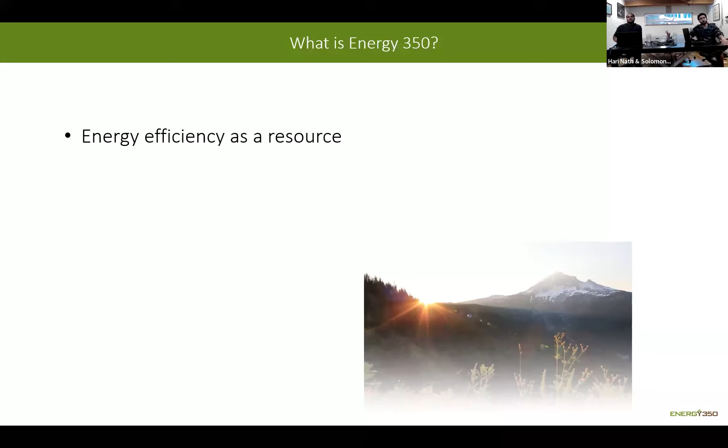One of our perspectives is that by connecting the dots of each system in the built environment, we can use engineering to mitigate our energy consumption. Our job at the end of the day is telling a before and after story with very limited information. And lastly, we're a company of weirdos, but we get the job done and we have the credentials to do it.

So really quick, diving into strategic energy management, that's what I'll be talking through. I'm opening with this question: what if you could save 3 to 5% of a facility's energy use with the same equipment they're already using? That's a pretty great deal, right? Why wouldn't you do that? That's what you're trying to do with SEM, Strategic Energy Management.

So what is SEM trying to do? SEM's goal is creating and sustaining a culture of energy management within a facility and making energy management a core business practice. I think it's really cool, and it's something I wish I had learned about when I was at Western. So I'm glad to be able to share it with you all today.

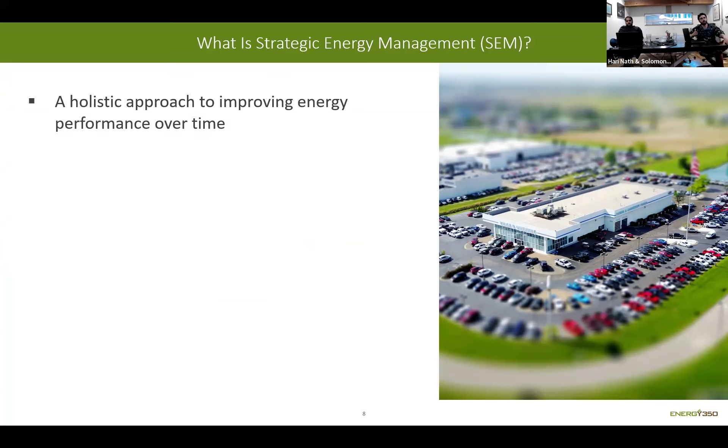So what is SEM? It's a holistic approach to energy, more than just project-based. It's similar to the idea of holistic health, the idea that everything is interconnected, from the people who work at the facility to the machinery operating there. And it's really focused on organizational change.

The goal is to help customers make energy management a core business practice, ingraining it in their culture. A major part of this involves educational workshops, technical support from our team, and getting buy-in from employees to make energy management practices stick.

It's really looking at energy savings throughout the facility. We look at the facility from a top to bottom, process by process approach to identify opportunities for savings. And these savings are actually measured through a top-down energy model, which I'll go into later.

We're really focused on low and no cost measures, so we're thinking beyond capital projects, helping them identify quick wins like set point adjustments, turning equipment off, fixing compressed air leaks, things like that.

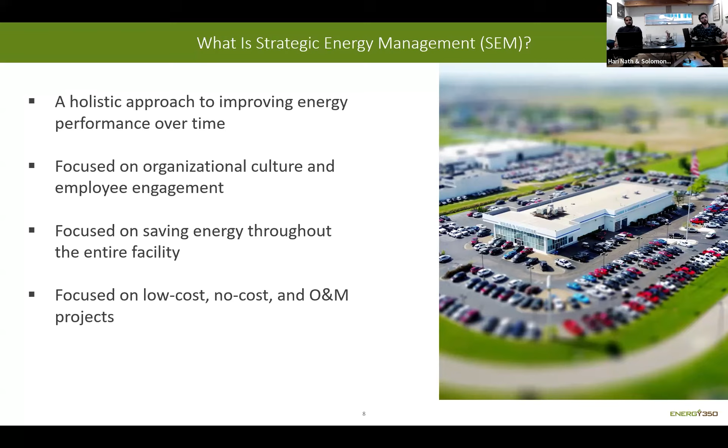And it's cohort based. So we work with anywhere from 4 to 9 different companies in a single cohort, and they're all sort of learning together and working individually to help save energy.

What makes SEM different from a typical energy efficiency program? The main differences are that SEM is really focused on teaching energy management practices, behavioral change, and low and no cost projects, while a typical program would be more focused on equipment and controls replacements and retrofits.

Additionally, SEM uses top-down regression analysis to measure savings, while a lot of other programs calculate savings using bottom-up, project-specific calculations. But both develop projects, quantify savings, and win incentives, with the goal to reduce the operating costs for the customer and utility.

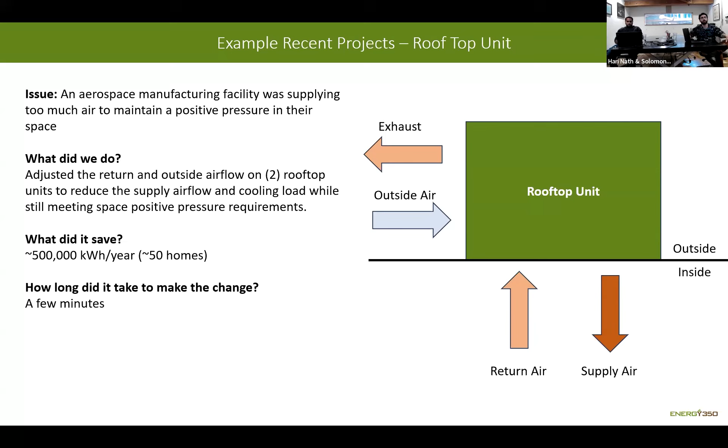Another example project: a greenhouse was using excess lighting in shoulder seasons when it wasn't needed. So this project was just to stop using supplemental lights earlier in the spring. The site actually came up with this opportunity, and we just helped educate and empower the staff to make the change through workshops and regular meetings.

Typically over 50% of the opportunities come from staff who are just empowered through SEM to implement their ideas. This saved 400,000 kilowatt hours a year, which is the equivalent of 4.5 million tacos if you burned them in a power plant to generate this electricity. This was also a really quick change - it took like 2 minutes and saved a lot of energy.

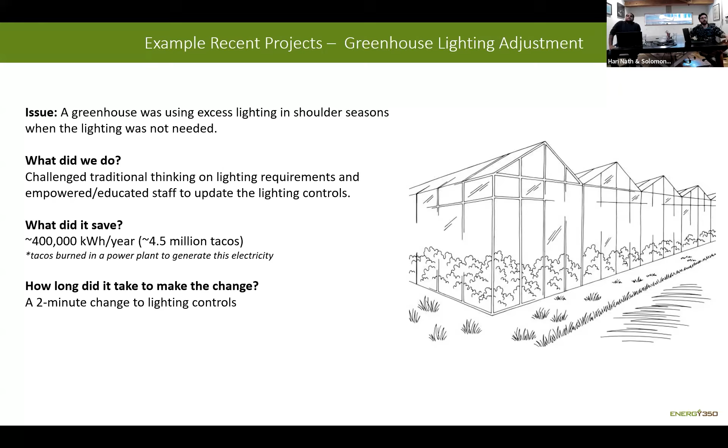So in this example, a food manufacturing facility had a lot of compressed air leaks, which were causing its air compressors to waste a lot of energy, generating extra compressed air that's consumed by these leaks. So what we did is we used an ultrasonic leak detector to identify compressed air leaks. You can see on the right, those photos are from the ultrasonic leak detector - basically it's heat mapping the sound of the leak, so you can actually visually see where compressed air is leaking.

Air compressors are only about 15% efficient, which means 85% of the energy is lost as heat. That makes compressed air very expensive to make and leak. So we found these leaks so that they could be fixed. It took about 5 months to fix all of these leaks, and it saved about 400,000 kilowatt hours a year. That's about 22 million homework assignments if you burned them in a power plant, assuming 3 pieces of standard paper per assignment - I thought you students might support that as a form of energy.

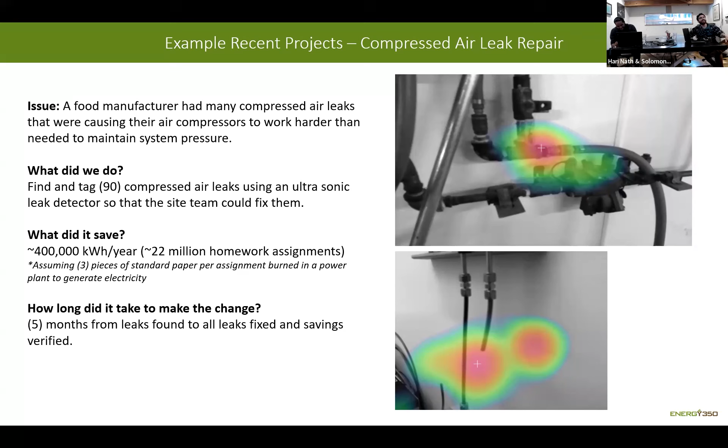So moving on - after you're implementing projects, how are we measuring energy savings? This is something I was mentioning earlier, this SEM predictive model, but I didn't really explain how it works, so now I can dive into that.

This is a tool that uses past data to make a prediction about future energy use. In this diagram, orange is the predicted energy use, and the blue line is their actual energy use. On the left side, that's the baseline period before they've started SEM. You can see the blue line and the orange line are really close - actual and predicted energy are nearly the same.

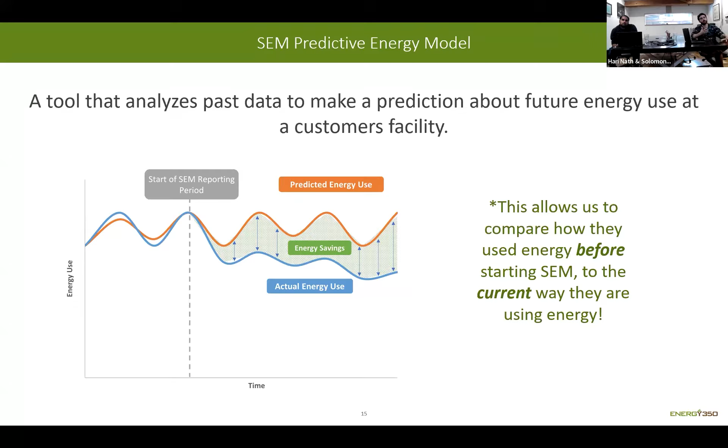Then they start SEM, and their actual energy use starts going below their predicted energy use. That gap between the 2 lines, that's the energy savings - that's what we're quantifying with this model. Something that's really cool about this is that it can capture energy savings from behavioral changes that would be really hard to capture through other forms of calculation. So it's really helpful for SEM when we're teaching energy management practices and making behavioral change for energy efficiency.

So how are we making these predictions? To predict energy use, we create a model using multivariable regression analysis - statistics. We look at major energy drivers and their impact on energy use. First we have a constant called the intercept in the model, and this is essentially the baseline energy consumption for the site. Then for each energy driver that we choose, we get a coefficient to multiply the variable by.

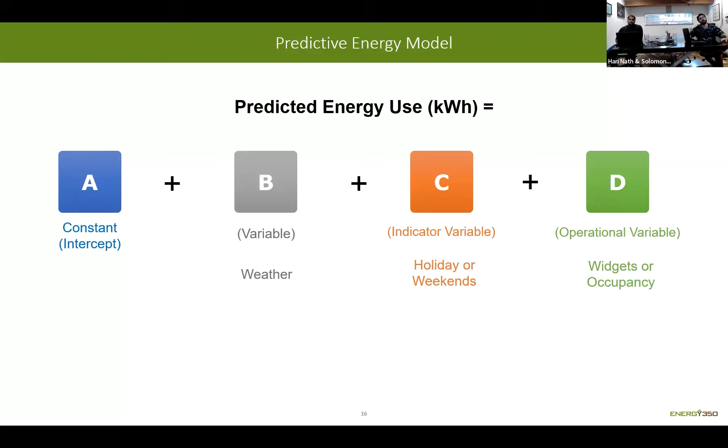These energy drivers can be like weather, schedule - like holidays or weekends - or production, because we're working with industrial facilities often, so like toys that they're producing, trucks they're producing, food, or occupancy, depending on the building type. Every site is different, so they can have different energy drivers even if they're similar in the same location. But that's kind of the typical framework of a predictive model.

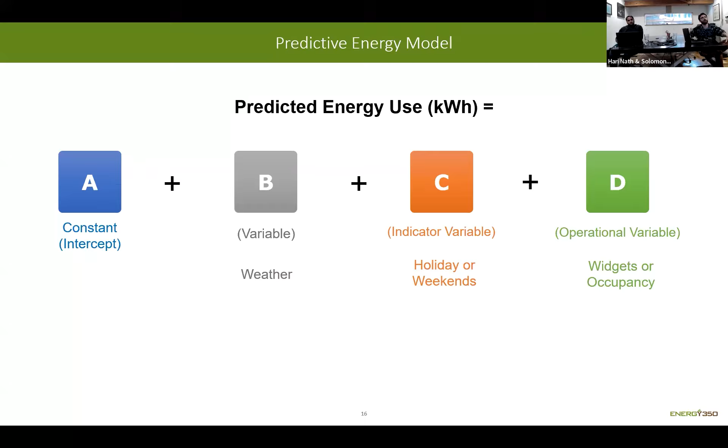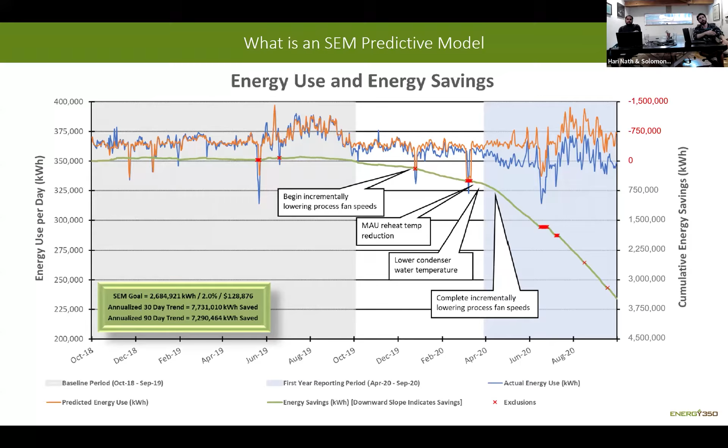And then they started implementing projects. The gap between the orange and the blue line is increasing as they're implementing projects. They're lowering fan speeds, reducing temperature set points. And as they're implementing these projects, that green line starts getting steeper and steeper. On that graph, you can see they're saving over 3 million kilowatt hours through these projects. As these projects are implemented, that saving slope gets steeper, and that's SEM really doing its work.

Now briefly, I wanted to talk through some of our curriculum that we use to help find energy projects with the industrial facilities we work with. First, we start with the components of energy efficiency as a framework for looking for energy efficiency projects.

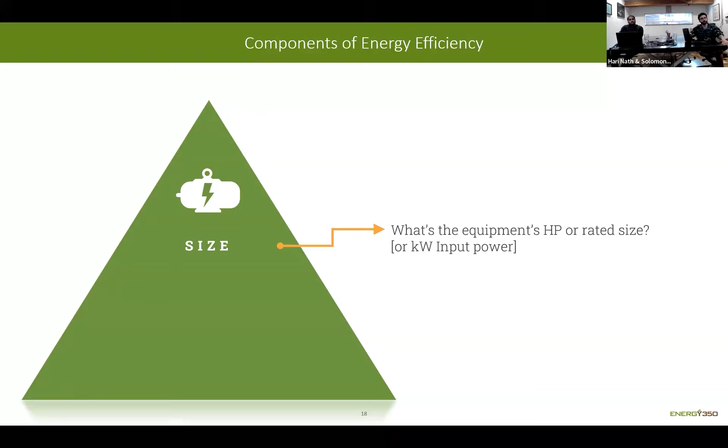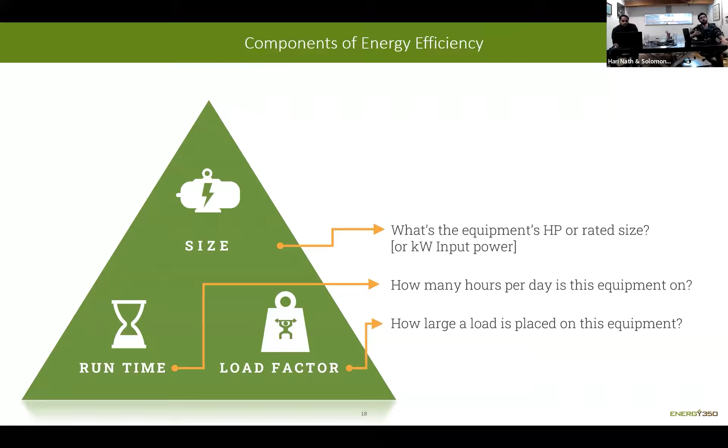The first item in this is size, so think like the rated horsepower of a motor or the watts of a light bulb. The next is runtime, so how many hours a day is this running? And then lastly is load factor - how hard is this equipment working when it is running, what kind of load is being placed on this equipment. Once we're looking at that, we want to think about what percentage of energy use is being lost as waste, and can we modify any of these factors to reduce that waste?

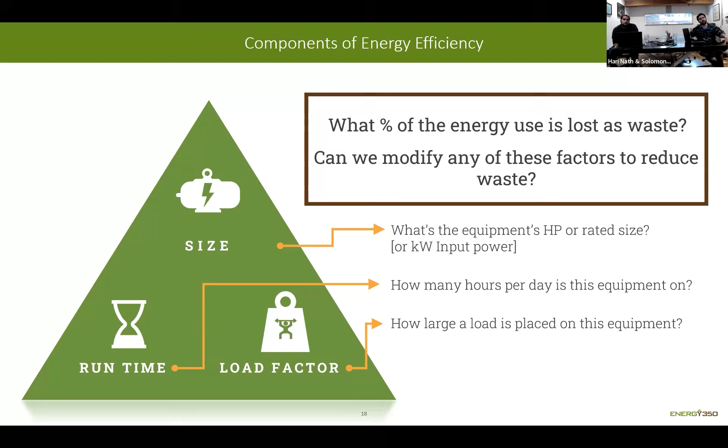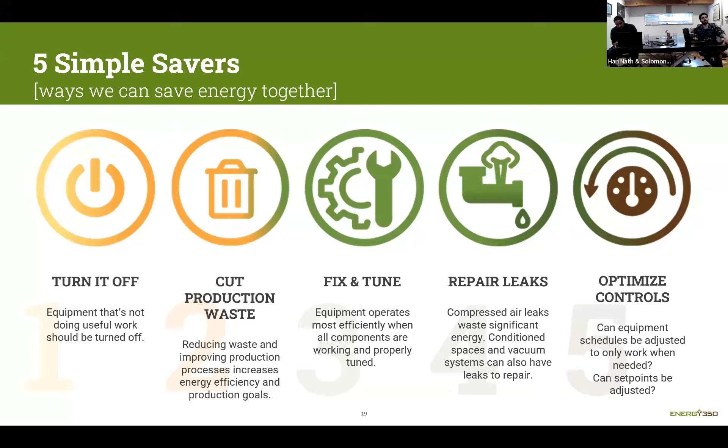That framework, along with the 5 simple savers which I'll walk through now, helps guide how we look for energy projects in facilities, particularly industrial buildings. So here's the 5 simple savers: turn it off, cut production waste, fix and tune your equipment, repair leaks, and optimize controls. I'll briefly touch each one so you understand what they are.

So turn it off - this is pretty simple. Equipment uses the least energy when it's not running at all. So if it doesn't need to be running, turn it off. That can be lights, process equipment, motors, HVAC systems, anything that's using energy.

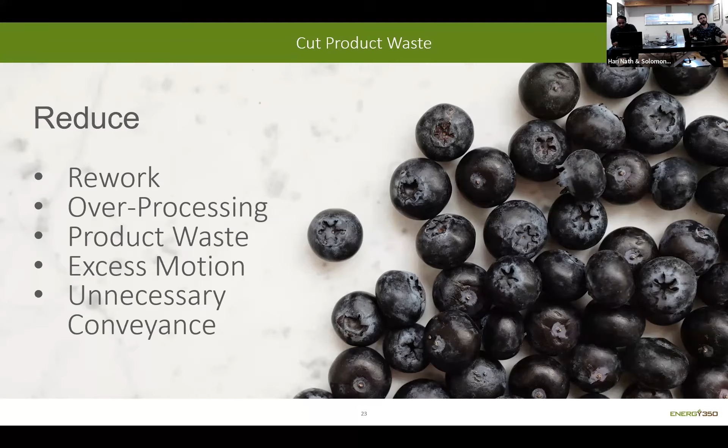The next is cut product waste. Like I mentioned, we work with industrial facilities that are making a process good, and production waste also wastes energy that was used to make that item. This can be reworking or repairing defects, creating wasteful or unusable products, or unnecessarily moving or processing the product. That's all forms of wasted energy that we want to avoid.

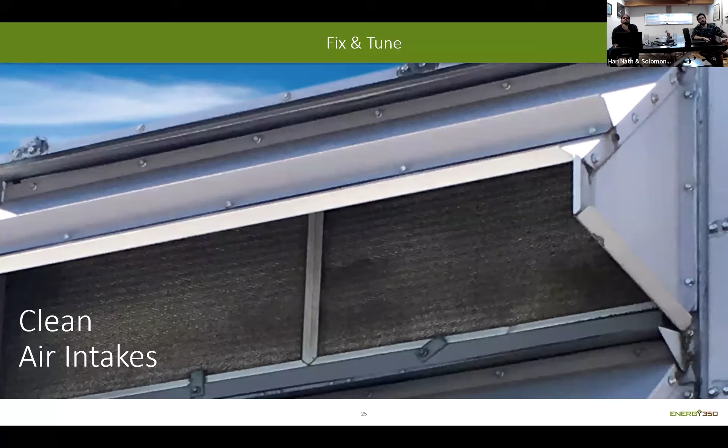Next is fixing and tuning equipment. Equipment operates most efficiently when all components are working and properly tuned. Dirty air filters are a really common example here. You can see in the photo, clean air intakes - making sure your air intakes for your equipment are clean. Broken dampers, leaking valves, broken sensors - fixing all of these will ensure that the equipment is operating like it's supposed to.

The next one is repairing leaks. By definition, anything leaking is wasted energy. In industrial buildings, compressed air is the big one. An air compressor is roughly 15% efficient, like I mentioned, so it's really expensive to make compressed air, and even a small leak can waste a lot of energy. Here you can see a 1/8 inch hole is costing nearly $3,000 a year in energy costs in this example - really huge energy use. But it can also apply to conditioned spaces, water pipes, vacuum systems - they can all leak.

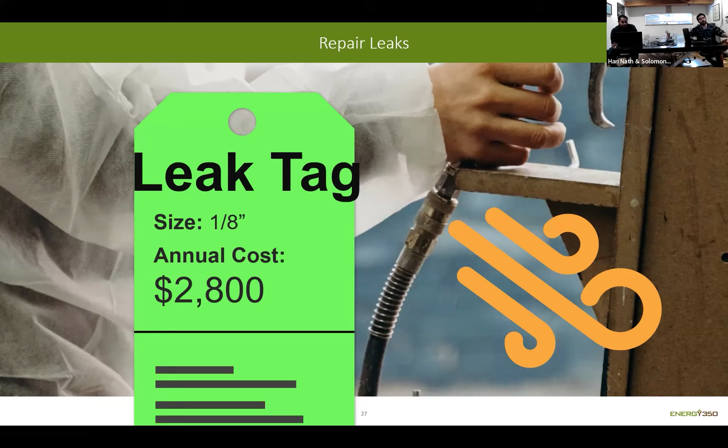And then lastly, optimize controls. Often equipment is scheduled when it's first installed and it's not revisited. This is really about matching equipment operation to the hours that it's needed, adjusting set points within space and equipment requirements. In this example, you can see there's an example schedule where the HVAC system is running normally on 4th of July when the site was shut down. So this would be a really good opportunity for scheduling the equipment off on holidays so they can save some energy there.

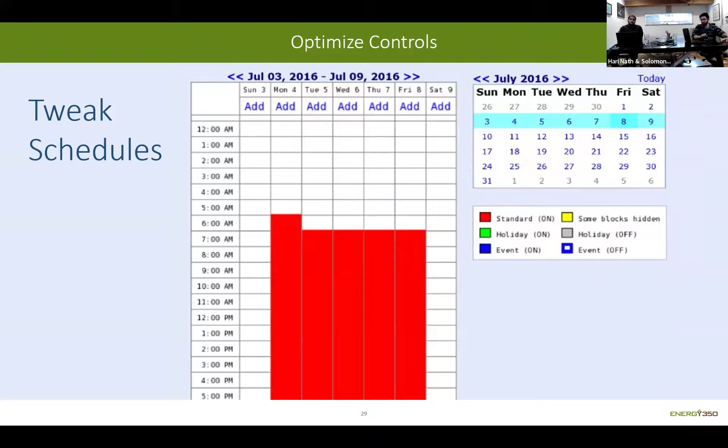Another set point example or controls optimization would be updating compressed air pressure set points. Since compressed air is so expensive to generate, about 1% of an air compressor's power is saved for every 2 psi that you reduce the air pressure set point, and that can really add up to a lot of energy savings if you can reduce that set point a lot. But also updating HVAC and process set points can also be really great energy savers.

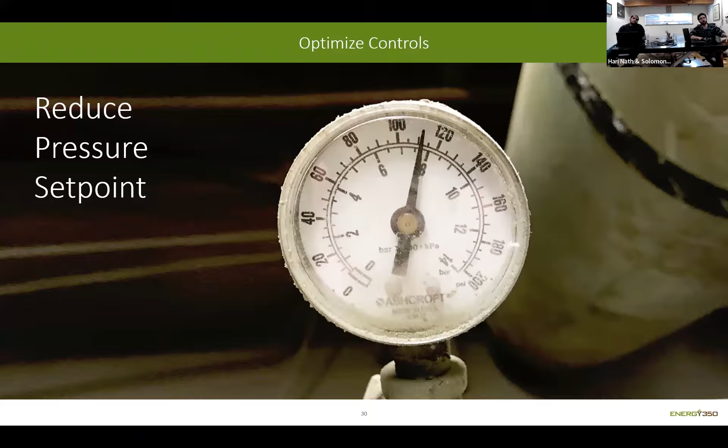Oh, let's see. There we go.

All right, so that was kind of like a great overview of SEM. A big portion of SEM is that top-down approach that Solomon was talking about. And I think the beauty of this company is that we have a lot of people that sound like they have the same job, but in reality have quite different jobs.

My day-to-day is almost the exact opposite in a lot of ways. It's looking at the individual component of a system and then breaking down that story, getting up to the whole building through understanding the whole system and how that impacts the whole building energy usage. This is a great picture of my colleague and I staring at compressors for a cooling system, both not having any information on how it's working, just taking time to process it, absorb it, look at what's going on.

My day-to-day is trying to identify and quantify an individual problem, something like an occupant saying it's too hot or too cold, or something not getting any airflow, and we have to quantify that somehow. So we have site visits. We are on site observing the systems and the behavior of the system, and also the occupants and people that interact with those energy systems. We data log. We have little data loggers that measure temperature, amps, motor on-off status. We usually do that over a 2-week to several month period, and that gives us a pretty good snapshot of what a system is doing. Then we analyze it and communicate it to look at potential cost savings, incentives, and sometimes CO2 reductions.

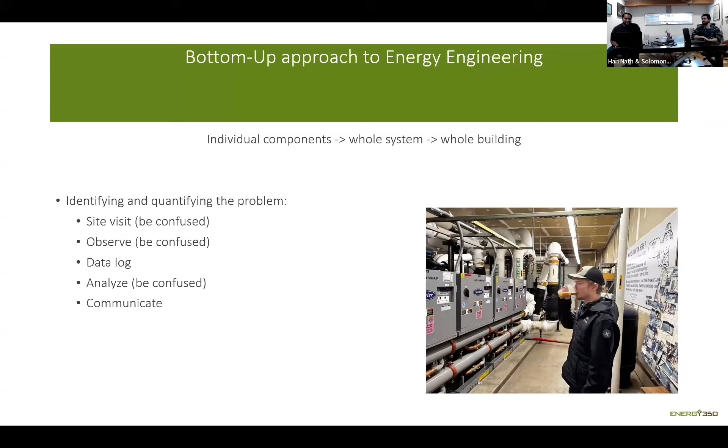A large portion of our job, both of our jobs, is storytelling. It's explaining a before and after of what that after could be. It could be a prediction, or it could be measurement and verification, where we actually verified through those data loggers that the energy usage and consumption of those systems has been reduced. And a very large portion of the job is being confused. I'm sure that translates to most of the jobs at our company, but that's just the nature of this work - it's like going into a room with the lights off, there's a dartboard, and you don't know how to hit the target, you don't know what's going on. That's how it feels a lot of the time.

So for site visits, I want to break down what it feels like in person. The first thing beforehand is just asking some basic questions. Why am I going? Am I contracted to look at a very specific system, or are they asking me to look at the whole facility and come up with recommendations? What are we looking for, and what systems am I expecting? Depending on the site, I could be expecting to mainly look at air compressors, industrial refrigeration, or HVAC. So I want to narrow down before I get to the site what I'm going to be looking at.

Sometimes it's pulling up the site on Google Maps and looking at satellite imagery to get an idea of what kind of systems are on the roof. It's always kind of surprising to realize so much can be learned about a facility just based on a satellite photo. And then, who are you meeting with? Recently I was supposed to be meeting with the facilities manager at a college campus, and I ended up meeting with their plumber because the facilities person was too busy.

So who you meet with really dictates the site visit - what kind of questions can you ask. You have to suddenly start thinking through different channels, like what is their background, how are they approaching the system, what do they know about the system, and what information they have can I get to help me get through this project.

Some of the gear I take with me is basic tools. I take vests, helmets, steel-toed boots for safety. I take data loggers, arc flash gear to make sure I don't get zapped - I've never been zapped, I don't want to be zapped, I plan on not being zapped. I take a notepad, I take a phone for pictures.

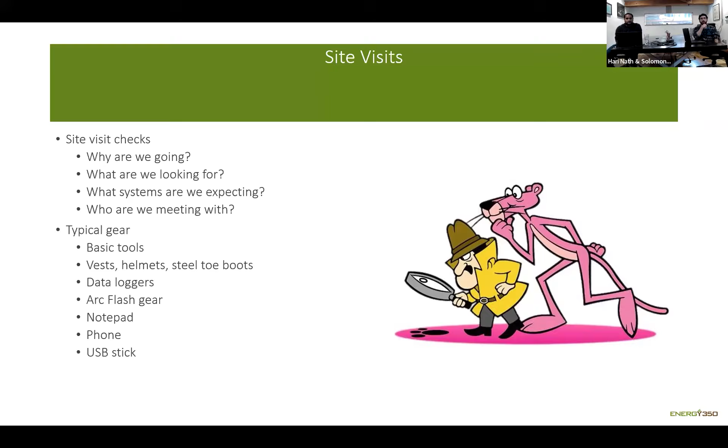So, expectation versus reality. I'm sure some of you have already experienced this if you've done any site visits, like the field trip class or any class where you visit different buildings and see the different mechanical systems on campus. There's kind of an expectation in your head of what something might look like, and then you see it and realize just how confusing the real world can be.

On the wishful thinking side, you hope everyone shows up on time, whoever you're meeting with, whether it's facilities, an electrician, business side, contractors. Ideally I get a few minutes in a quiet room to talk, I explain why I'm there, and I hopefully get a walkthrough with time for questions and photos of the systems. In an ideal world, the space is clean, organized, and safe.

In reality, I've been forgotten several times by site contacts. I show up, they don't know who I am, they don't know why I'm there, even after I've explained it. Or they've been told by someone else that I'm coming and they still don't know why I'm there. And then the one person I meet with doesn't know about the system I'm trying to look at.

So there's a lot of curveballs thrown at you, and you have to think really fast on your feet, like, okay, this person is a plumber, I'm dealing with water in some way. What information can we overlap on? What Venn diagram exists that I can get some information from them and explain why I'm there? Trying to connect those dots.

Often there's no time for a quick chat, you're just on the site visit moving. And often there's loud machinery where every question results in a very loud 'what?' that doesn't get heard by the person you're asking. And often they're dusty, chaotic, and sometimes dangerous, especially in industrial spaces. Or if it's wet, if you're dealing with electrical systems and there's water nearby, sometimes you have to say, well, that's electrical, that's water, I know those two don't go together, and just walk away or explain that you can't operate on that system if it's not safe.

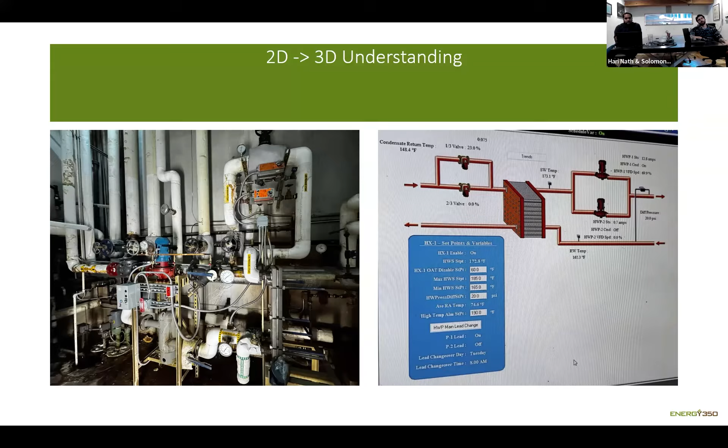That is the point of our job: to explain the misuse of energy, so to speak, by not doing what it's supposed to. But sometimes it's hard to have that engineering mindset of asking what is wrong with everything in front of you. You're trying to look critically and ask all these questions, but oftentimes it doesn't make sense why something's not working. Sometimes it just looks like a pressure set point, sometimes it's a temperature set point. But if you slowly map it out and draw out each section, you can oftentimes get to the answer.

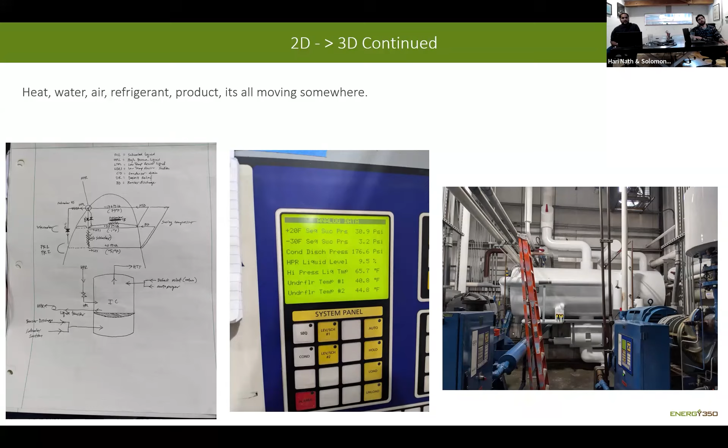You can break it down into different components. You can ask various people who all have different pieces of knowledge and backgrounds - the site contacts - and run it past all of them to get a pretty good understanding of why this is not working, why it's wasting energy, and build the model from there, quantifying the energy savings from there.

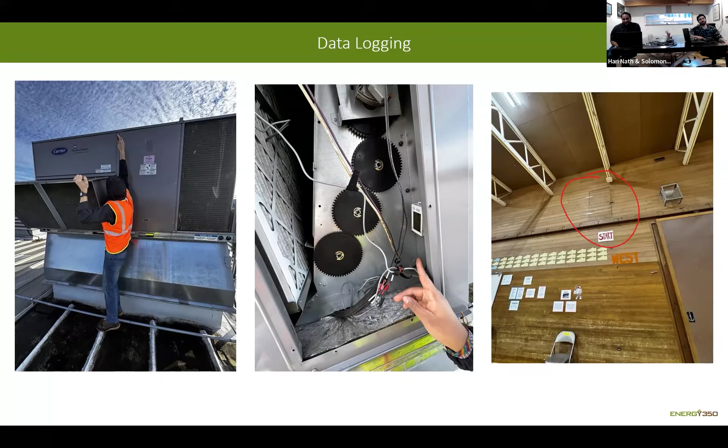Nope, that's not going to work. Let's just say we're looking at the fans. So we said we're looking at the fans, and the kid goes, I don't know what to do about that, and walked away. So sometimes you just have to tailor to your audience. In this case, I think there's a limit to how much you can explain to a 5 or 6-year-old. But yeah, that's often what a day-to-day site visit might look like.

So I wanted to go over the foundation I've been self-reflecting on, of what got me into this place. This presentation and this whole meeting has been a nice way to think about how did I get to this point, and what are the different components that led me here. The obvious one is that it's science - a lot of it comes down to science and engineering.

But I've noticed ever since college that a big thing I had to learn was how do I learn, right? There's only so much I feel like I can learn from online, from research, but I often really value a mentor and a teacher, whether that's a professor, senior colleague, or site contact who's willing to explain something to you. It feels like finding spaces where you're allowed to ask a dumb question is very important.

I think sometimes it's ego getting in the way of not wanting to ask the dumb question. Sometimes it's fear of being awkwardly outed as the person who doesn't know what's going on. But once you ask - and people are realizing more and more with dumb questions - you'll realize many people had that same question, but weren't curious enough or were also scared to ask. So asking the dumb questions is extremely important.

The internet is a big, wide, endless void of information. There are white papers, academic papers out there, engineering forums, some very old textbooks like ASHRAE or ones we read in college. YouTube is surprisingly helpful too, with sources like the Engineering Mindset. I think both Solomon and I remember referencing that, because the videos have great diagrams of what's going on, whether it's refrigeration, HVAC, or electrical systems. So if you're trying to understand the visual of what's going on, that's a great resource. Understanding the thermodynamics and the physics is extremely helpful.